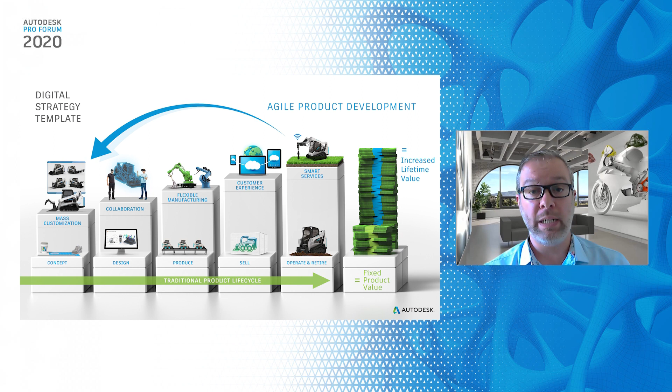As I mentioned, organizations relying on a linear process often experience the challenge that this type of workflow results in information being reworked, information lost, errors, and productivity wasted. In fact, when we look at a company that already has various technologies in place, they often still fall back to manual processes to communicate and share with other parties.

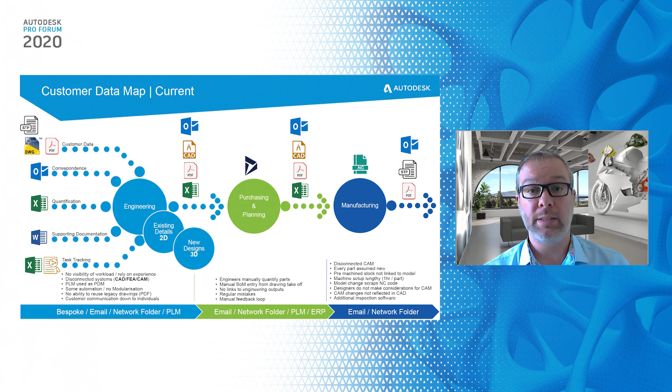In the UK alone, when we run discovery surveys for our customers, their teams often come back and tell us that on average they're spending 21.5 hours per person per week on activities that just don't add value to their design, engineering, manufacturing and delivery process. Obviously, it can include activities such as email communication, but there's always a significant amount of time and effort lost when they try and deliver their projects.

As you can see, based upon the previous example, we don't expect to come in and disrupt an organization's workflow to streamline it. What we want to do is help these organizations to resolve their barriers and challenges by developing a connected, streamlined workflow that we call a digital strategy template. Because by having a strategy, you have a better chance of success. By the end of this presentation, what we'd like you to be thinking about is, where are you today? Where do you want to be? And what's stopping you getting there?

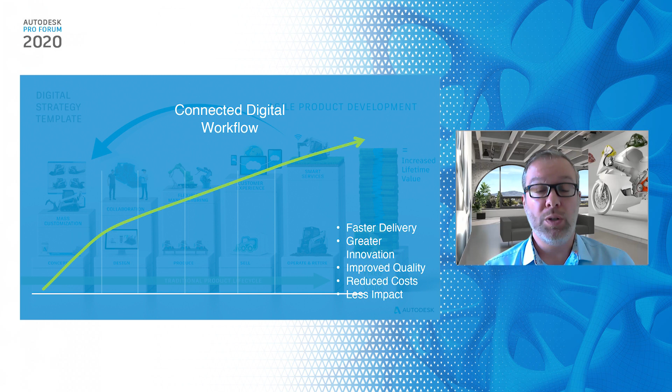So let's take a look at a set of examples that can be used to help you develop an end-to-end workflow. We're basing these set of examples on a customer that has two types of product. One mainstream, customers that can choose a set of options to ultimately choose and select the product they wish to purchase. The other, something that is engineered to order. Roughly, often 80% standard and 20% that requires an engineer's input to develop a solution to.

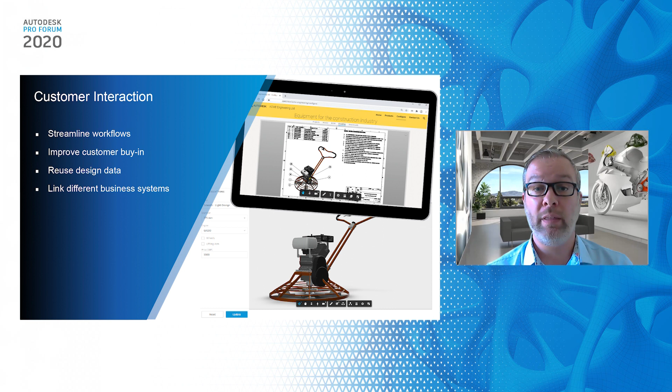So what we're looking at first is this idea of a configure to order workflow. Customer interactions that need to be able to utilize the engineering logic that you built into your products, but make it available much earlier on in the process, enabling your engineers to spend more time and effort working on things that are more profitable.

What you're seeing on the screen here is the engineering data with a certain amount of logic built into it. But this product isn't something that needs to be re-engineered every time a variation occurs. In fact, the organization has defined all the predefined options that a customer can select. Obviously, this product needs to be manufactured in the first place, and we need fabrication details to suit. But by making this data available for your customers or your sales teams, it means you as a design and manufacturing organization can spend more time on the profitable undertakings.

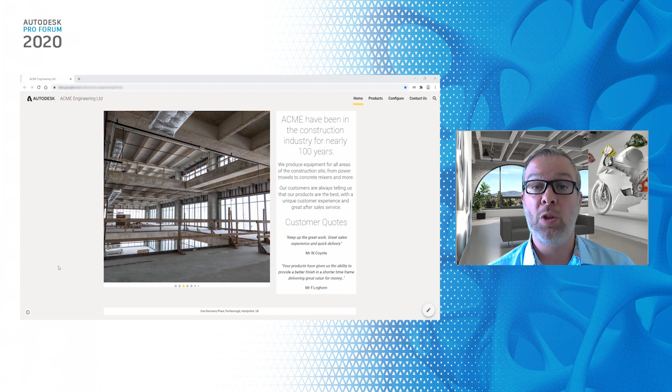By making this standard application available in a customer environment, as you're seeing, it means the customer can get an understanding of what's input into that design, what they can choose from, what it looks like, what it might be broken down into, and select the various options that you've allowed them to dictate.

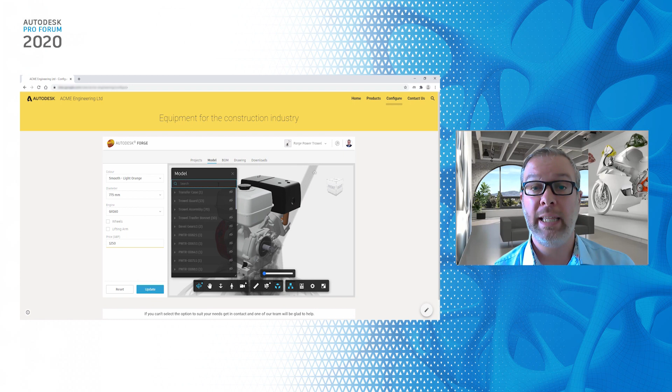Once these options have been defined, they can then submit either a request for a more accurate quote, or in this example, you can see once the customers place the inputs, they can then define the sort of feedback they want to receive. For example, what type of outputs they might want to utilize and communicate with. Whether that's just the 3D representation of the design, or elements such as the cost, the bill of materials, and anything else that you want to allow them to have access to.

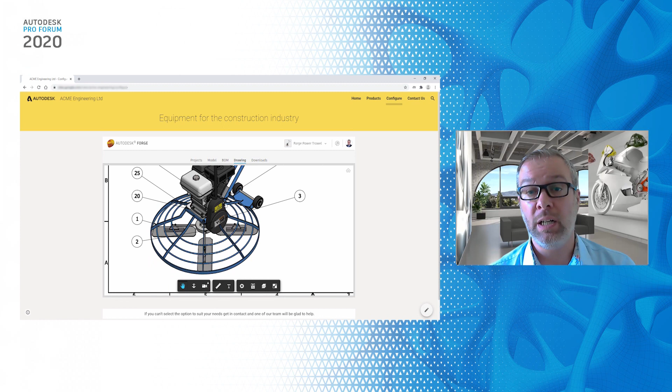Again, making it a much more streamlined workflow because your customers are gaining access to this information, and often customers will make their buying decisions before they've even spoken to you. So by making this information much more available, much earlier on in the process, means some of the hard work has been already done when that customer contacts you for the final order, for example.

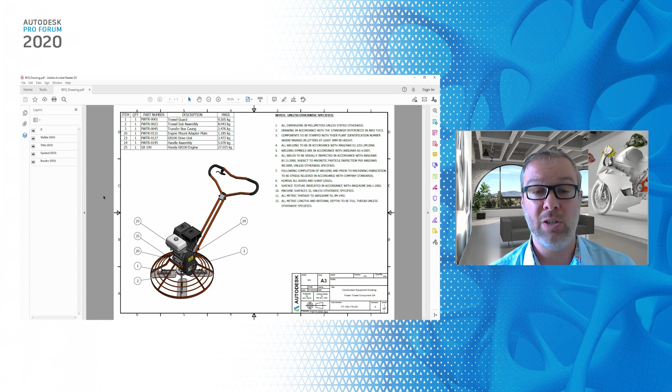And as you can see here, by allowing them to download additional file formats, it's giving them access to information that they can supply to you to make it much easier for you to understand what it is that they want.

However, not every project can be just made available on a website for a customer to interact with. Your engineers are still there to undertake the value-add tasks. So, how do we define what those engineers are doing, what current work is in place, and what information we need to capture from the sales teams?

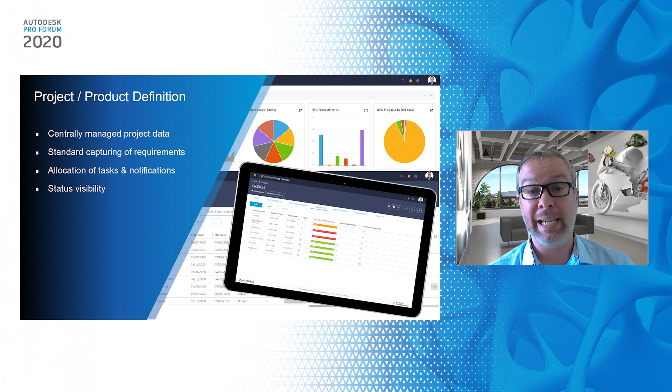By utilizing an upfront workflow, being able to capture the requirements upfront means everyone in the business that has access knows where that project is, what the requirements are for that project, and where they are currently within that process. This example is showing you how a design manager or someone in the business that needs to make the decisions can understand how many projects we've got going on, who's undertaking those projects, and whereabouts are we within that process.

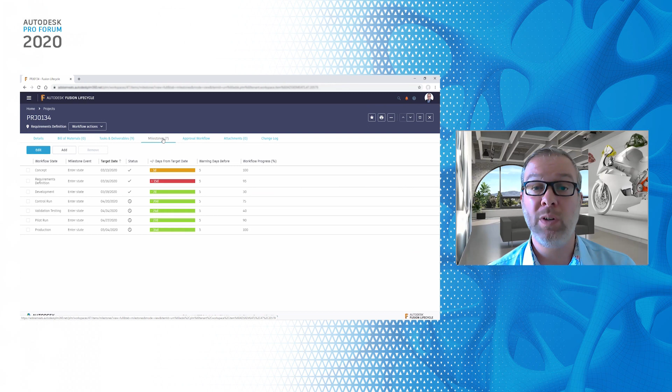By capturing the information that's been defined up front means instantly they can get an understanding of maybe who's got the headroom to undertake the next task, how much effort is going to be required to deliver that project, where are we within the timelines of that project. But the real benefit here is we've got a controlled way of driving the next process. When the engineering manager in this scenario understands all the requirements have been met, they can then move the workflow on to the next process.

The design engineer is then going to be notified that something has been generated for them to undertake, but also the downstream benefit of what you're seeing here is an environment has been created in the design environment that means they don't have to sit there and think about what's the project definition, who's asked for it, what's the numbering schemes we're going to use. The structure that the engineer is going to undertake and work in has already been predefined, and it's now down to the design engineer to undertake the work that they can achieve.

Now, I mentioned right at the beginning that most organizations, even if their product is engineered to order, there is often a heavy element of reuse. 80% in this scenario may be standard and 20% will be re-engineered to suit a new customer requirement. So the design engineers need an environment that allows them to quickly find and reuse to generate that new development.

What you're going to see next is how the design engineer can find the relevant information very quickly, being able to filter across all the previous projects that they may have undertaken based upon certain criteria that they know. In this case, it might be a description and a material specification, but instantly they get an understanding of the impact of any change. At the same moment in time, they can understand the complexities of everything that goes into that design, while also getting a feel for what it previously looked like.

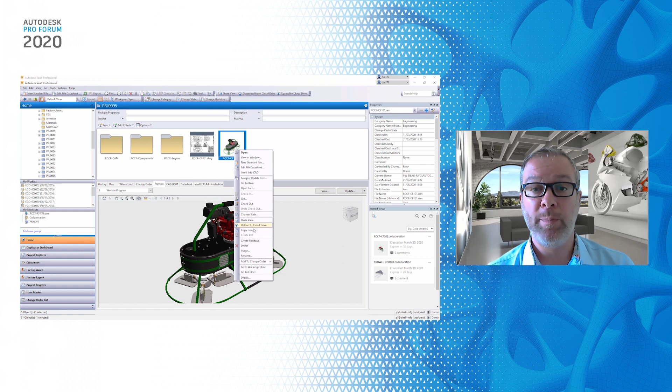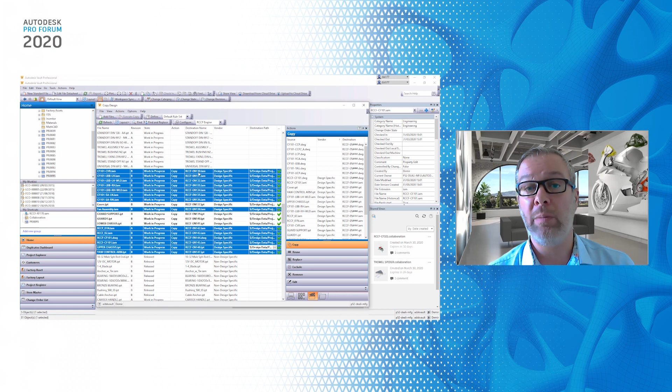But because this is going to be an engineered to order solution, they're going to reuse as much as possible and copy the elements that they're allowed to modify and manipulate. What you're seeing here is the engineer not just pre-selecting the information that they're going to reuse, but defining the data that will be copied with a new numbering scheme that they're then going to utilize to develop that new project definition. This then becomes the start point for everything they will do moving forward. The downstream advantage is all the hard work has been done.

There may be engineering logic that's already applicable to the design, but they want to limit what an engineer or a designer can change. You're also seeing here that the designer can get a very quick appreciation for the amount of information that they can actually modify. In this case, being able to see what's still locked down because we just reused it, and what information is available for me to edit and change based upon the controls that are in place.

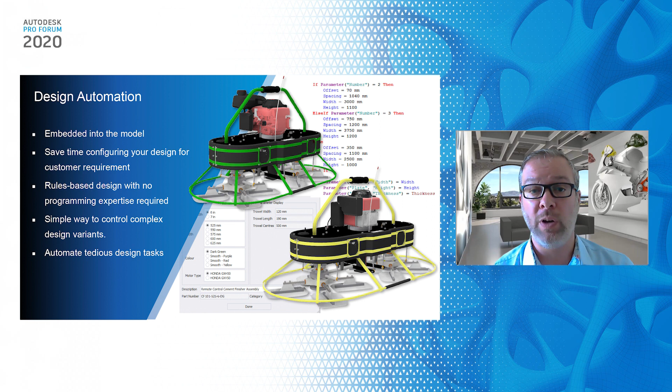Remember, we've already undertaken the project and we are making changes to it. So there is already a whole host of engineering logic that the original designer has implemented within that portfolio of applications and products. What you're seeing next is how we can utilize some of the design standards that you can build your own logic into your product to enable your design engineers not just to quickly reuse, but to manipulate this product to suit a new project requirement.

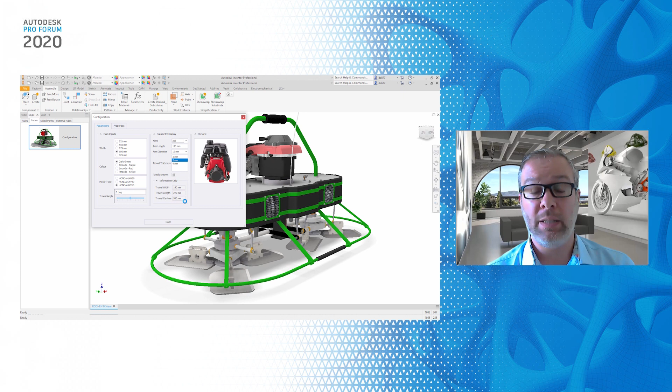Because we have that 80-20% rule, we're going to use the existing project as the basis for a new design. However, there is a whole host of intelligence already within that initial design. So the designer in this particular example is actually making changes based upon previous definitions within the remit of what they're allowed to do. Don't forget, this is pretty much that 80% of change. We're just changing things that I'm allowed to change. I'm not necessarily reworking a lot of these items yet.

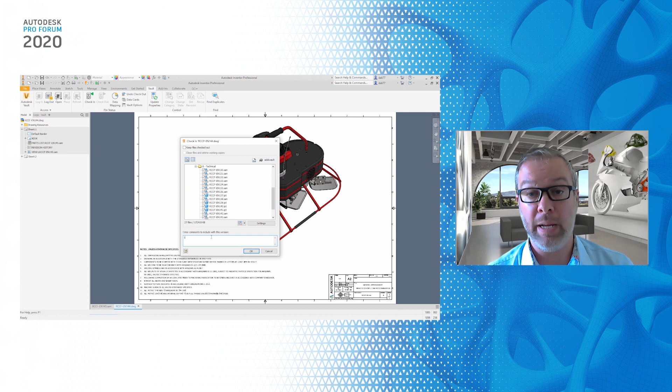However, once we've done the basics, not only is our drawing going to update automatically, but then we can spend more time working on the elements that need re-engineering. So once we have the basis for this new product, we can then send this back into our data management environment for the next person to undertake the task that they need to.

Now, when information needs to be generated, we often find that organizations have a whole host of data available in lots of different formats. Often this could be information that was archived a number of years ago, so it doesn't even exist within a CAD environment. What you're going to see next is how we can take information that's been previously archived and utilize that in an intelligent fashion to be able to give us that kickstart into designing a new component.

Here you can see just a PDF file of a previous design that has been archived away a number of years ago. But because we can manage it, we can find it quite quickly and decide whether it's suitable for reuse. What you may not have noticed there is I brought that PDF file into a 2D environment that turned it into an intelligent set of information that I could utilize. We can then reference that data inside of our model environment.

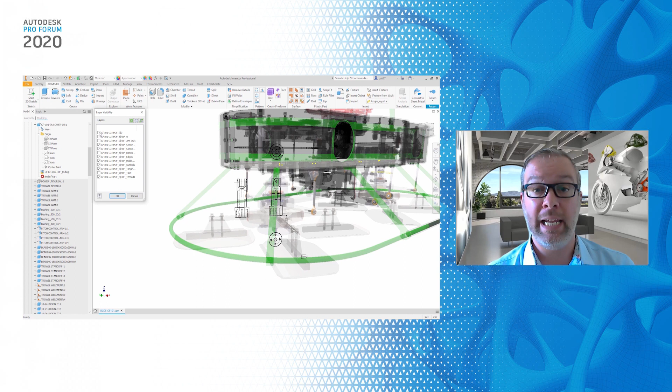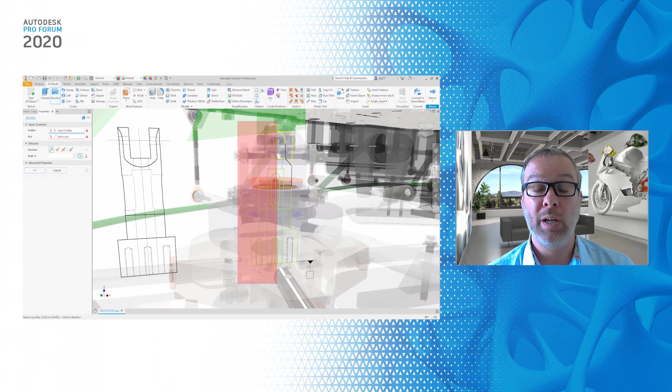So it means that rather than me having to create information from scratch or refer to prints that I'm going to utilize off my desk, I can start consuming the information that's now in intelligent format to develop our new component. In this case, it's going to be the shaft to support the trowel subassembly of this design. But because we're working in a common 3D environment, we can get an understanding of the form and the function of that design, even though this started off life as a straightforward PDF document.

Once we've developed this component to a suitable level of detail, we can then have an understanding of how heavy it is if we specify a specific material, or if there's other information we need to consume, such as different orthographic views. There's nothing stopping you from reusing that information time and time again, applying the mechanical detail appropriate to manufacture this element.

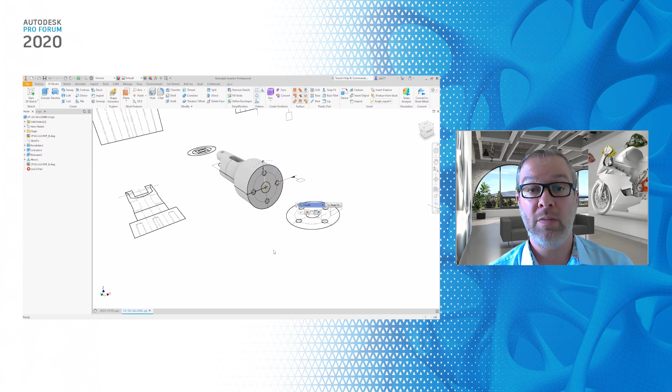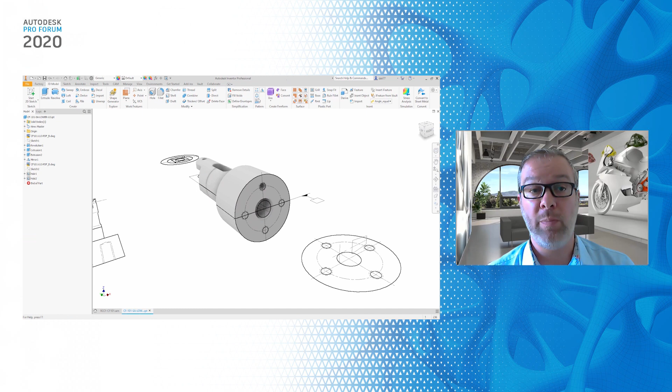In this scenario, you can see we're referencing the same information time and time again, in this case to develop an alternative location of features on the design. However, everything is associated back to that 2D data where we consumed the PDF file, so I don't have to generate a new subset of 2D documentation, because so far we haven't actually made any changes. We're just developing a 3D form that we can utilize to understand, is that going to fit?

But don't forget, we have turned this into an intelligent 2D drawing. So if a design change is required, we can go back into that 2D environment, make our change, and see the impact of what we've done in our 3D world, giving the user ultimate flexibility to consume information from lots and lots of different sources.

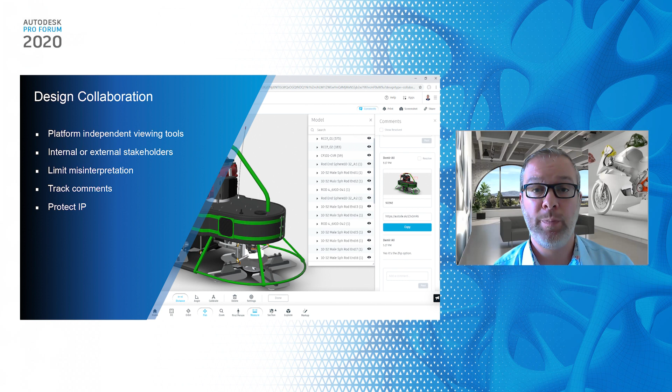We often appreciate that a lot of customers struggle to collaborate. They often resort back to traditional methods such as email, imagery, static 2D drawings, and PDFs to communicate their designs. What you're going to see next is how we've given our users the capability to collaborate, not just in a secure fashion, but give their users a unique experience that allows them to explore the products before you've made them real.

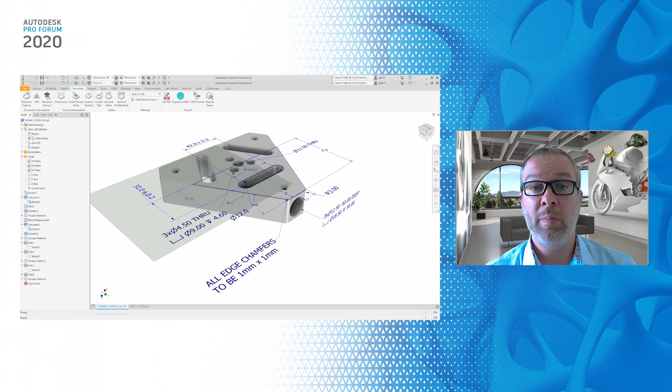We also often find that depending on the level of technical ability within organizations, people can misinterpret 2D drawings. In the past, organizations producing documentation purely relied on 2D drawings to communicate their product design downstream. Now we can take that and make it in a much more flexible manner, much easier to consume.

You should be seeing on the screen that we're not just relying on 2D drawings and documentation to generate the information necessary to manufacture this part. We're adding 3D annotations, consuming dimensions developed within the modeling environment to show what that component should be manufactured like, what tapped holes are applicable, what surface finish if we want, and what tolerances are applicable to that design.

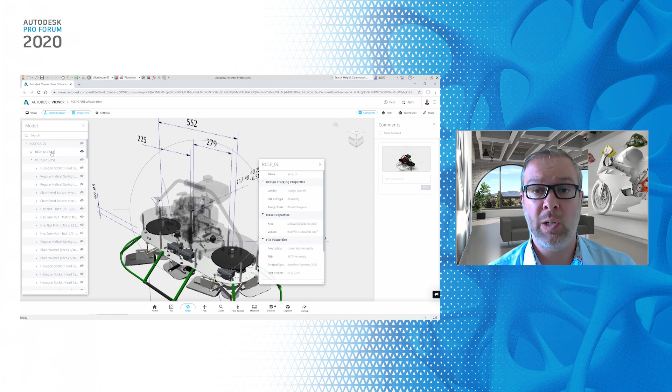Once we then start communicating that design, a customer or someone internal or external with a secure link can start interrogating that model based upon the information you've shared. They can start pulling it apart, turning things on and off, and getting a much better understanding of what your intention of that design was there to address.

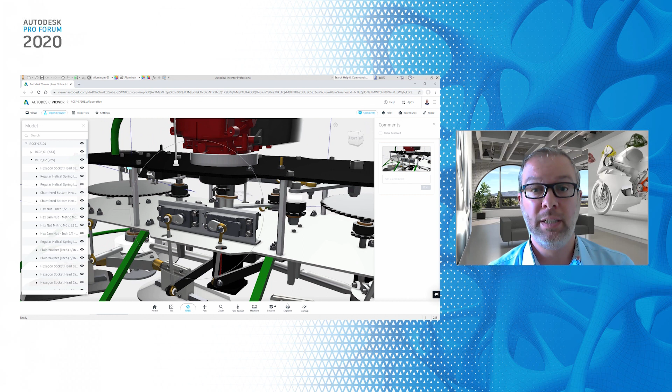It also gives them the ability to comment and mark up. In this scenario, they've been able to see that a challenge may have occurred based upon something I've overlooked. Being able to collaborate on any web-enabled device means you can get feedback from the field, from third parties, as long as they've got access to the internet.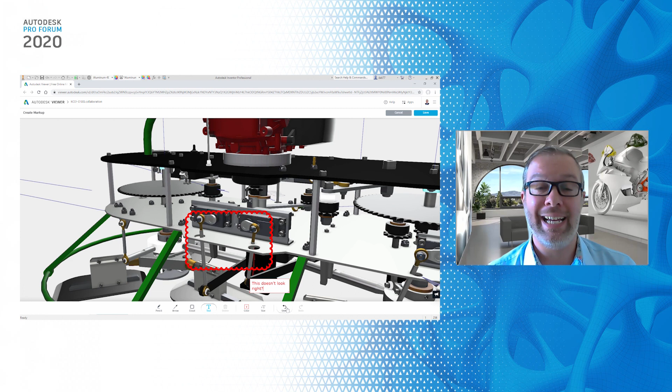The one benefit of what you're seeing here is that they're not just marking it up and applying comments to the design I've shared, but as a user within my CAD environment, I'm getting to see that feedback. I'm not having to go and try to interpret imagery or static documents that may have been marked up. I can understand natively, based upon the information I initially shared, any comments applicable to what I want to achieve.

We also appreciate that when you're communicating with third parties - and when I say third parties, it could be a supplier, someone else in your business, or your customer - you're delivering data in another file format. We often find organizations aren't lucky enough to be working with one platform, one version of that platform. We're often having to consume information from lots of different other software vendors' file formats. So what customers need to do, to remove that barrier and rework of information, is to be able to consume that data as easily as possible.

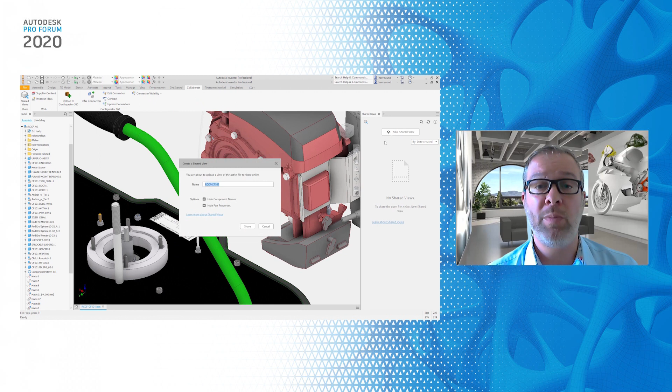Within the design environment we work within, we can work with information across the majority of manufacturing suppliers. In this case, you can see how we've referenced a SolidWorks model because the supplier of this engine is utilizing another platform. But when I reference this design, because I'm not translating it, I'm just referring back to the original, we can see that there's a problem - the supplier's given us something that isn't suitable for our design.

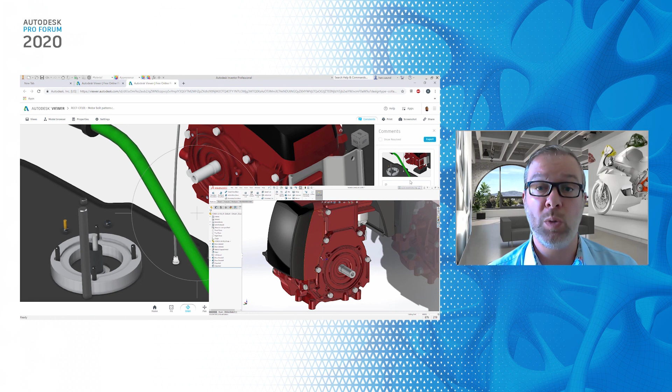And what we need to do is tell them that a change is required. Utilizing the workflow you saw a moment ago, we've been able to communicate back with the supplier, make it really obvious what changes are required. And by consuming information via the cloud, they've been able to supply the data back to us in a connected workflow that means we can see and understand the changes that they've made.

By consuming that information and utilizing it, we can now understand how it all fits together. And we've been able to work in a really collaborative method with people that don't necessarily have access to the same tools as us. Once we've positioned the component, we can then start understanding, are there any other possible challenges or issues that may be applicable to this design?

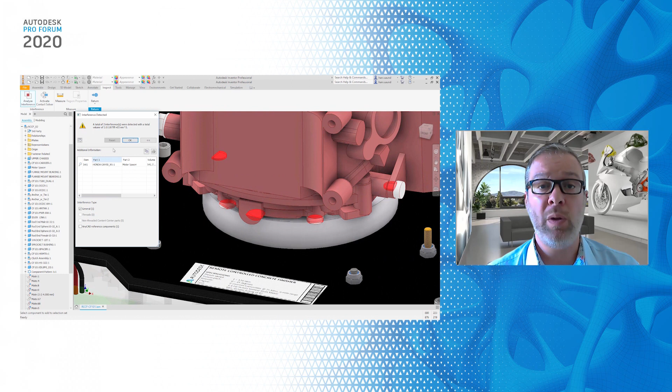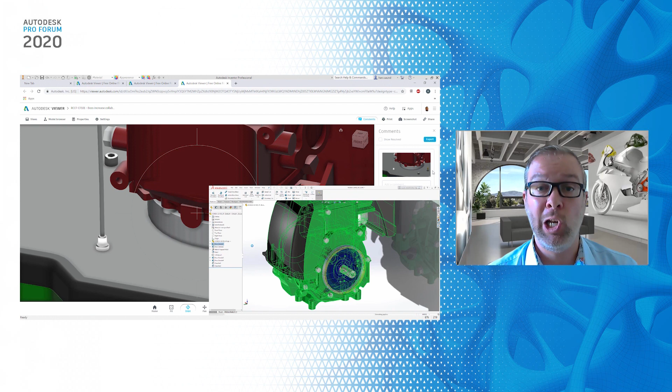As you can see here, by running a quick analysis of any clash, we can now understand that although we've asked for one change, the reality is the adapter plate or other aspects around that mating condition need to be modified. Again, working in this complete cycle of review, we're able to communicate, our customer or supplier in this scenario is able to understand, and they can then pass any changes back on to us so we can understand the impact. Working in that complete loop allows you to remove the barriers of rework, be able to make you more productive and deliver information to, in this scenario, production much faster than in the past.

Now, when design engineers are working and developing their products, they need to have an understanding of what challenges they may face downstream based upon the tolerances that you've applied. So within the same environment, utilizing the same information you've seen throughout, design engineers have a great deal of flexibility to be able to analyze and interpret the overall impact of elements that have gone into their product design.

What you're seeing here is the information that we actually applied earlier on. We've got the overall tolerance analysis of the design. What you're seeing here is a 1D stack up. The user has been able to define what direction they want to look for any tolerance challenges. The system will then come back with all the information that could have an overall impact on the end conditions.

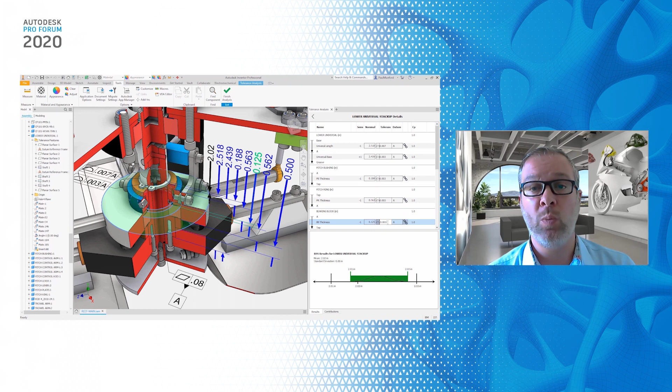What you're also seeing here is the user can start interacting with that information, understanding the worst case scenario, any statistical reports they want to understand. And the reason this is important is if you can imagine, we can understand that the overall impact of all the tolerances within our design will actually make our mechanism outside of scope and a change may be required. We can provide the report and the evidence of why that information needs to change because it will not meet the overall conditions and scope of the design that we're introducing to the market.

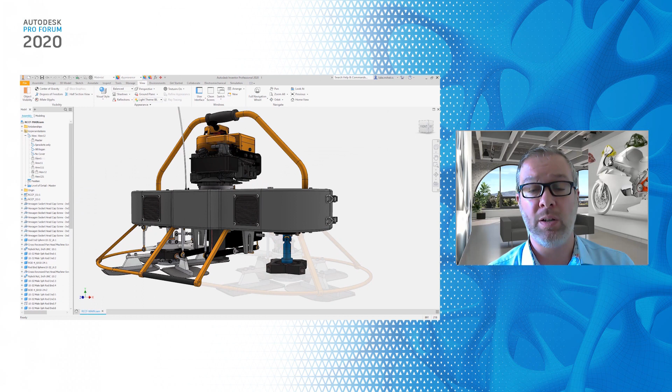Something that a lot of customers take for granted is the ability to be able to analyze. Now, we speak to lots of different organizations that utilize different platforms and different methodologies to bring their product to market. Depending on what industry you're in, you may rely on a third party to code check your design, and that's still valid. However, we often see that organizations struggle to make changes based upon feedback they're receiving from people that are analyzing their designs.

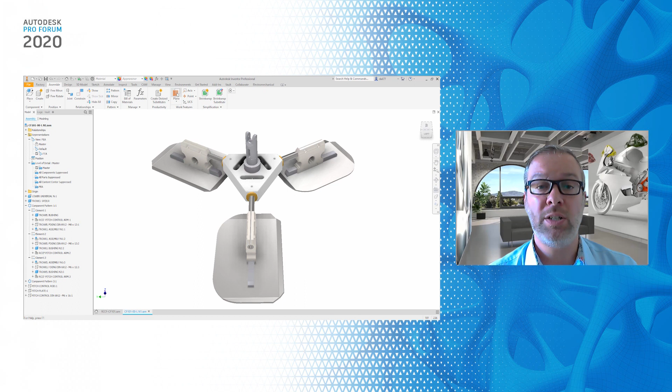What we want to introduce is the ability for designers to be able to iterate their product, iterate their challenges before necessarily passing that on to another third party for final verification and validation. But remember, we reused a previous design, and that previous design has already been validated, but we have been making changes to that design. So within the same environment, the user, the designer in this scenario, can start verifying and validating what they see, what it fits like, what stresses and motions are applicable to it, and whether any changes within their undertaking have impacted their final result.

So without the user having to do a great deal, in this scenario, change the motion load based upon the new motor that was inserted into our design, they can have an understanding of what sort of impact that new motion load will have on their overall design work, and the changes that need to be made to overcome the overall safety factor, the deflection that's appropriate for quality, or anything else that's appropriate to that design.

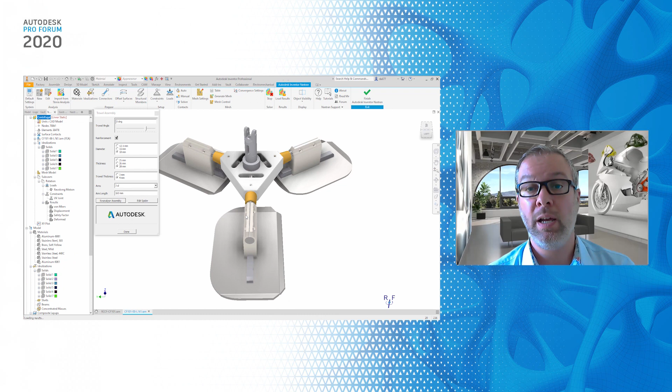And because we have the logic built into this component, we can start making changes based upon what we're allowed to modify. In this scenario, you can even see that we can quickly rerun the analysis without having to go back into the environment, because we've already done it once. We've made changes to the design, and we just want to see what changes and how they impact the overall output.

In this case, you can see that we've significantly improved the overall deflection, and we're now within the quality aspects of what we want to address and deliver to our overall solution.

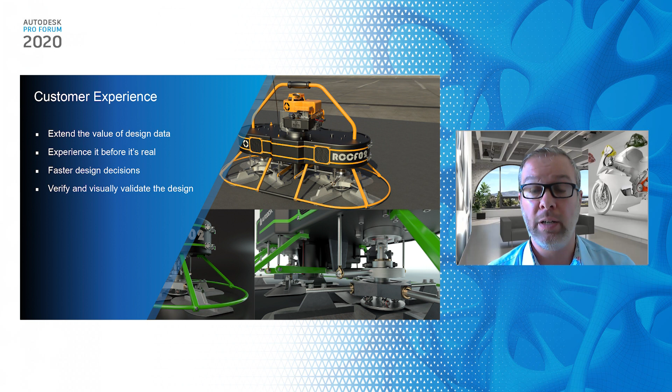Now, when it comes to communicating with your customer, we talked about customer experience at the beginning. One of the ways you can improve customer experience is getting that person into the room, or understanding what it is you're developing before you physically cut any material. In the past, organizations have often relied on rendering capabilities to show more realistic imagery of what that overall concept will look like before a physical item is produced.

However, we can now take that one step further, whether it's building a customer's confidence in what you're trying to develop, providing an interactive way for them to see all the possible options in a more realistic manner, or developing a more immersive environment where they can see in front of their own eyes what it looks like and understand how it works.

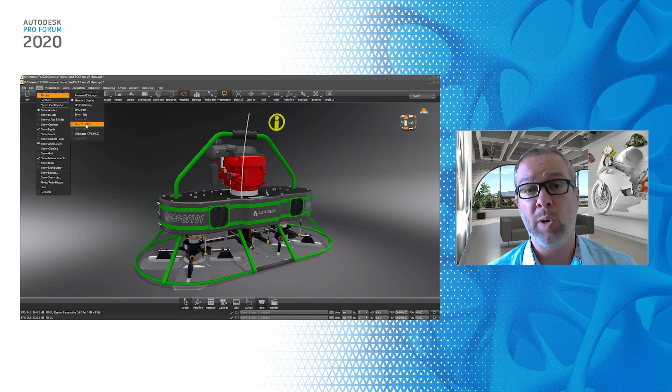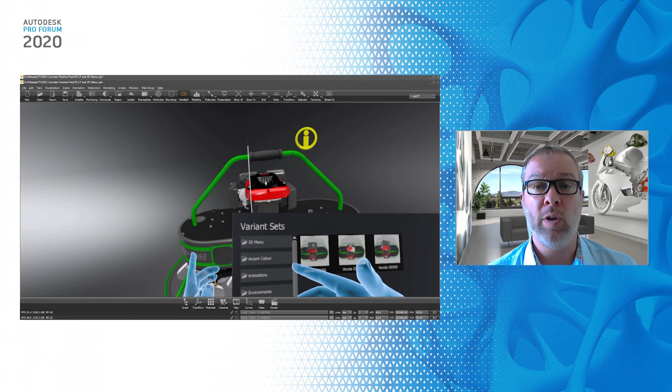So not only can we start interacting with this like a point of sale tool, we can start immersing ourselves in a virtual reality world where we can see the overall size and envelope we're working with, where we can start interacting with those options, whether that's just so they get a better look and feel of the material finish or anything else appropriate to that design.

By immersing themselves in the VR world, not only does it give you the ability to have a better appreciation of that product, but it also means you get an understanding of the overall size—not just the look, but the overall aesthetics of what that will look like.

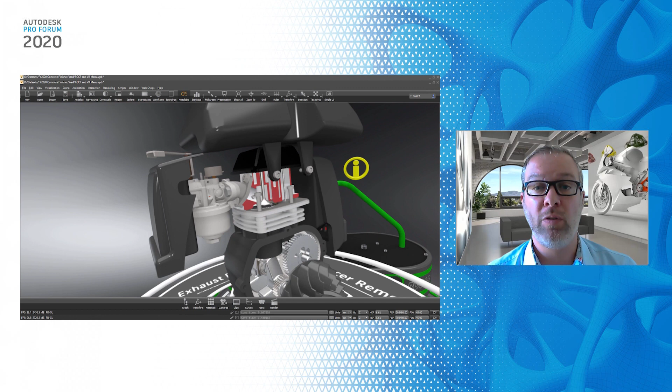In this scenario, you can even start producing technical information, whether that's the ability for someone to immerse themselves in an assembly instruction, a maintenance manual, or even putting tools into their hands so they get an understanding of how much space they've got to work with if they have to maintain a product, and what the overall health and safety requirements are if they're moving between equipment.

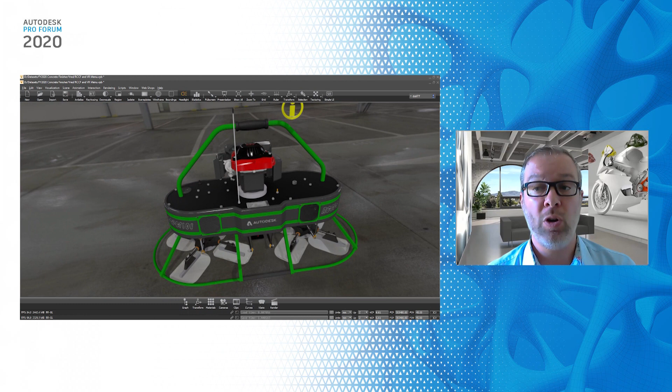But again, we can also mix reality. We might be in virtual reality, but we can start connecting the virtual world with the physical world—not only seeing how this component and product is going to look, but controlling it with a physical controller. So although they're in a virtual world, they're physically working with the controller that could be used to maneuver this design. Again, bringing in that customer experience and offering something a lot of your competitors are unlikely to be doing right now.

We often speak with organizations who are aware of a lot of the capabilities coming onto the market. A few years ago, Autodesk introduced generative design. Generative design allows you, the designer, the ability to define what sort of load conditions and envelope a component might be expected to work within.

Rather than a designer trying to develop individual iterations, which are often limited by time—so even when they are iterating different forms, they might be limited to no more than a handful because time often dictates a designer can't spend overly excessive amounts of time developing a solution—wouldn't it be great if a designer could define the outline, submit the overall project to the cloud, and utilize the infinite computing power of the cloud to come back with lots of variations in form that a designer can then select, based upon material characteristics, manufacturing selection, or safety factor, to come out with a form they may not have been able to think of using traditional techniques.

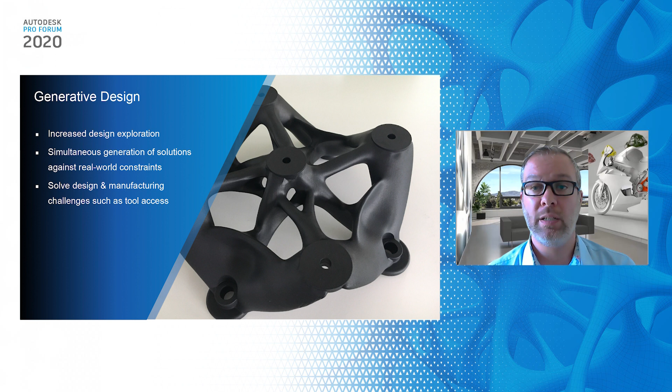What you're seeing here is the results of that generative design—the user being able to select, based upon their knowledge, something suitable for what they want as an outcome.

In this scenario, not only is the product significantly lighter weight than what they've done in the past, but it's also stronger. It might use a more additive approach, but it again allows them to develop a project that's maybe more aesthetically pleasing, but certainly unique compared to their competitors' offering.

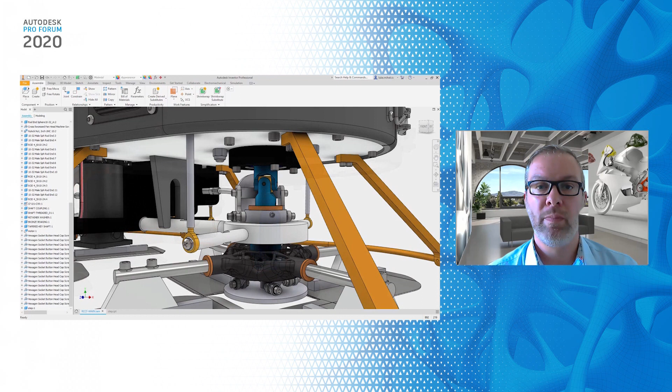When it comes to manufacturing, we again see that even if an organization has the ability to drive their machine tools, they're often thinking about how to best communicate information between the design environment and the manufacturing environment, often working in disconnected systems, which means rework can be time-consuming, and any changes made need to be re-engineered within the manufacturing world.

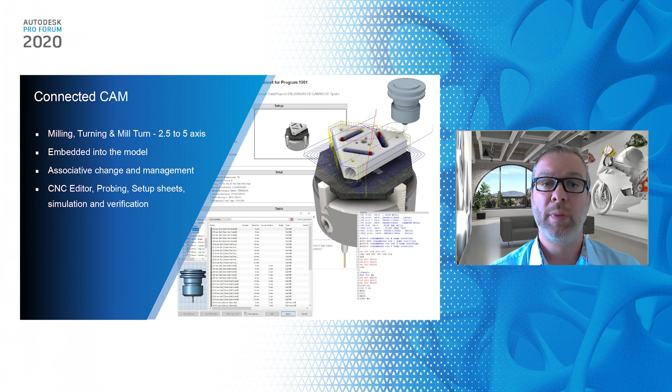What you're seeing here is the same design environment with the manufacturing information completely attached and enclosed within the same window. The design has already been done once, so the original manufacturing information is already captured within that data that we copied. However, there might be information we've added since that we need to add toolpaths to.

So what you're seeing here is us modifying the original toolpath that we copied and adding information to it that now allows me to pass this on to the machining center or for machining verification. But it is fully associated back to the design environment.

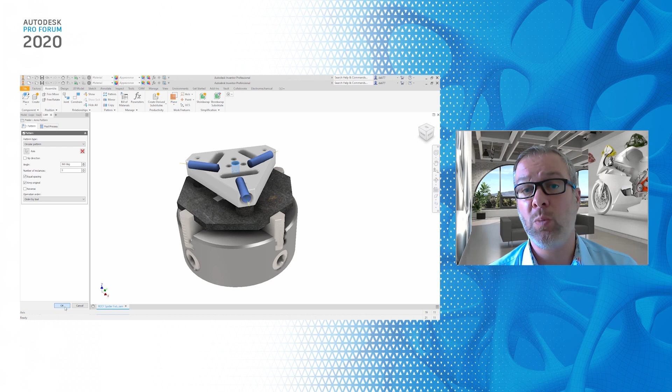So if a change is required based upon customer request, all we need to do is go back and make the change, maybe modify the tool paths that are appropriate, in this case the number of drill positions, and everything else will update accordingly. So the outline, the remachining of the adaptive clearing, the material we need to get rid of to give our final finish, is all being updated with a minimal amount of effort.

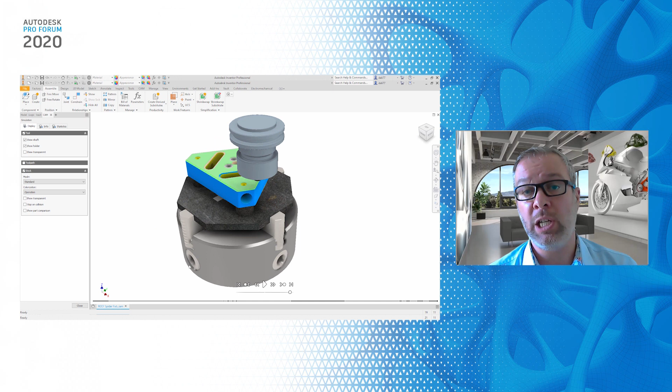The benefit to organizations is if your design engineers have the knowledge, they can get an understanding of what the change will mean based upon the manufacturing process that we expect, how much time would be added to the overall finishing of this component. We can also see the overall and output the NC code, the G code that's applicable.

We have an understanding of what setup's required, so the guy in the machining center can understand what tools are required, the order in which they should be placed, and anything else that's appropriate to that machining operation.

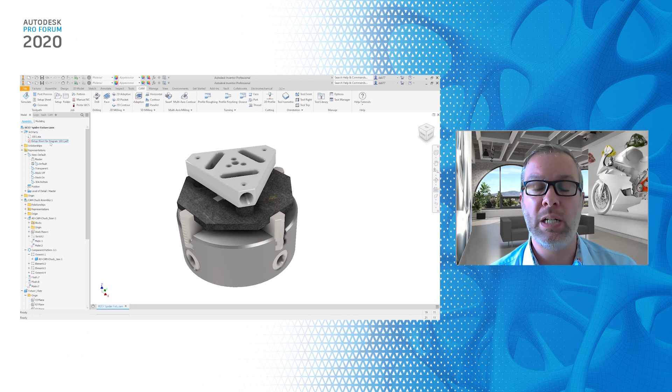And finally, what you're seeing here is not only is everything embedded into that one design environment, but all the associative information with it, such as that setup sheet, such as the G code, is being managed in the same environment. So all the engineering data is being captured, saved, and controlled, so anyone with the relevant access can see the right information at the right time.

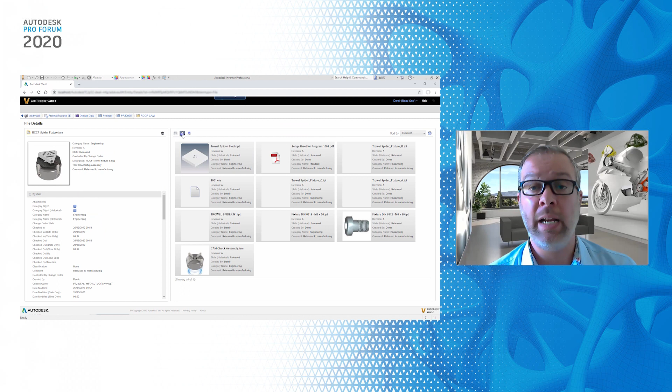Now, if you can imagine the operator on the machining center has a system with a browser, they can then log in, and as long as they've been given secure access, they can download the design data, download the G code, download the setup sheet, and anything else that's appropriate that's been stored with that one common source of truth.

Now, you might not have noticed that the design engineer put the information to review. And what we need is a more flexible way, and what a lot of organizations need is a flexible way for, say, engineering managers to be able to communicate with that team, maybe approve data on the fly.

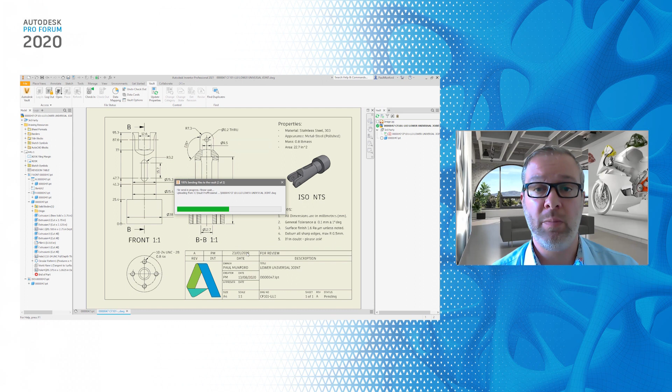So what you're seeing here is the design engineer checking information into the data management system. They're associating any relevant data, in this case maybe a manual document that's also associative to that design, and they want to make that data available to the rest of the business. But to do so, they need to go through a review process.

Now, when this design data goes through the review process, it might be that, especially with the current situation, you're away from the office. As long as you have network access using the mobile device, we can log into the system and start reviewing the data that we've been asked to look at.

As you can see here, not only are we checking information out because we've been given the relevant provision and access to be able to do so, but we can also start utilizing the benefits of some of the mobile capabilities to start commenting on the information that's been shared with us.

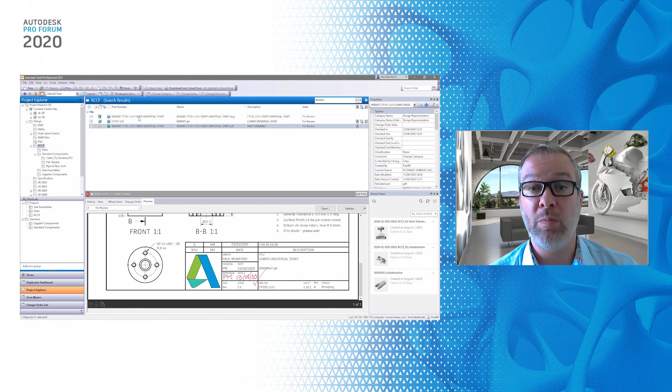In this case, it's not really meant to be a physical signature, but it is giving a workflow using mobile information to be able to comment and review that data and even start changing the life cycles. So as long as the engineering manager in this scenario has the relevant privileges, they can then move design data through the stages to eventually release this information to the rest of the business.

Once this data is then released, we want to start thinking about how can you make more benefit from it? How can you ensure that everyone downstream has got access to the right information?

By connecting all of this information through, it helps our customers have that synchronized workflow, whether they're delivering the data that we produce to a business system, or whether we want to make more intelligent information available to site, so people installing, disassembling, or just doing general service work have something that is of more value to them.

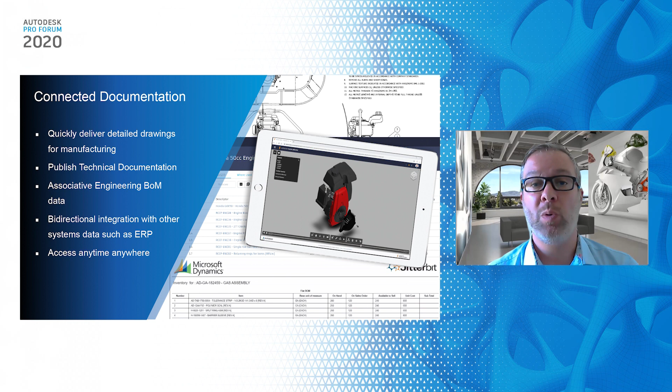So what you're going to see here is two workflows. The first workflow is me making this information available to the rest of the business.

To do so, they then push the data into a suitable workflow. In this scenario, what we actually want to do is generate a technical document that allows someone to interact with our 3D design, not just rotate it, not just look at the properties of it, but actually see the sequence of how something should be assembled or disassembled, and maybe annotations that go along with it.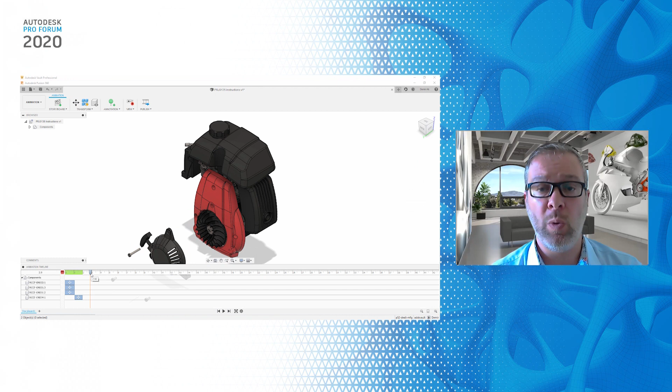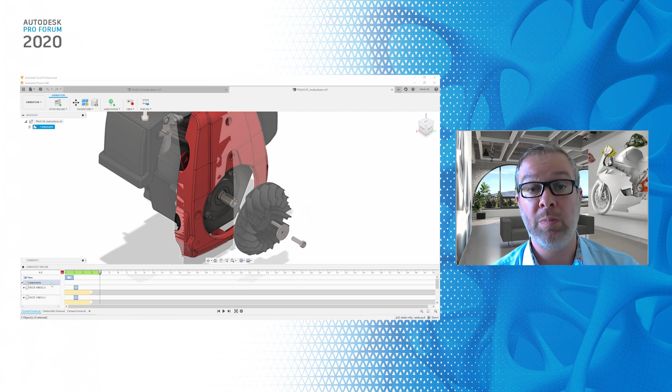By making this data available to the cloud, we can then utilize our cloud platform to build something that's a little bit more interactive. By pulling the components apart in the right sequence, we're not only developing an interactive technical set of information, but we can also deliver this data to our business systems, link it, so anyone with the right level of access can have a better understanding of what should be done when they need to maintain this product.

By then delivering this data to our business system, in other words, moving the information from external collaboration into released to manufacture, not only are we locking the design data down so everyone can understand and view the information when it's at the appropriate stage or gate, but this information is now being automatically synchronized to our business system. In this case, our Fusion Lifecycle platform.

The real advantage is we can now start taking the design bill of materials and start turning that into a manufacturing bill of materials, adding items such as paint or grease or non-designed elements that still need to be purchased. They still need to be stock controlled. You can also see here all the visuals that are associated to that design are also available within the system without anyone having to go elsewhere, really addressing the data at the center.

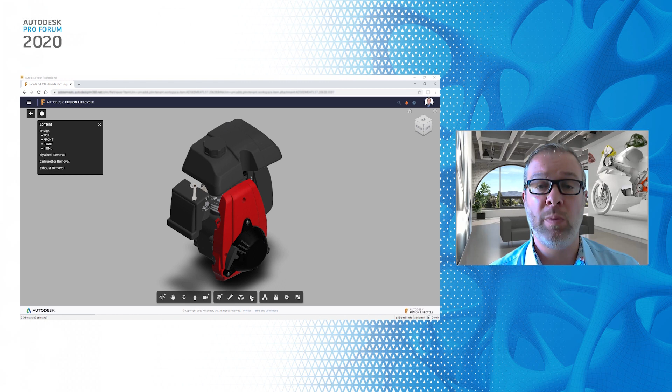And finally, what you're also seeing here is how the information such as the technical publication is also associated to that record. So anyone, anywhere in the world that has access to the system, with the security that you require, can now see all the information without the user manually uploading PDF files and anything else that's typically done within a lot of organizations that we speak to today.

The last two aspects of this presentation: remember we talked about flexible manufacturing. Now you've seen one example where an organization can utilize the embedded capabilities to address their manufacturing needs. In that scenario, it was around subtractive manufacturing. But we talked about automating production. Now that could be utilizing production lines, factories to build your products and optimizing those factories. But in this particular customer example, it was about automating the setup on the machine tool itself.

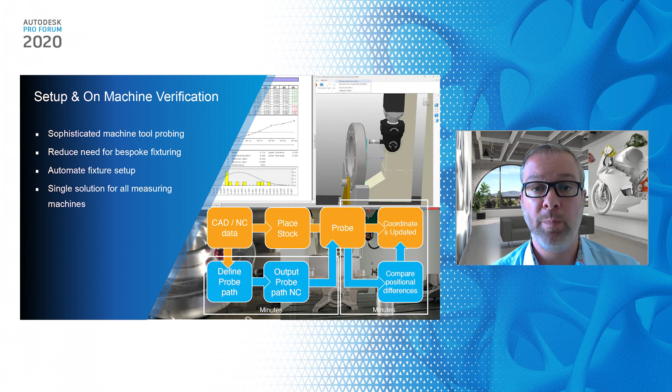When organizations work with pre-machined stock, it's often quite difficult for them to set that machined stock on the machining center itself because they need to move the origin and everything else that's appropriate to the G-code. What you're seeing in this example is on the left-hand side, the manual setup, and on the right-hand side, using our automated setup capability. Now on the left-hand side, the user of that machining center is having to manually manipulate the stock that's been pre-machined into the relevant position. So when we start machining the final finish, the component and 0, 0 is exactly where I expect it to be.

On the right-hand side, with the automated setup, what we're actually doing is placing the stock material anywhere within reason on that machining bed. We're then probing that position and the code is being modified to suit the position on that machining center itself. Now, even if you don't understand some of the aspects around this, what you should be able to appreciate is the amount of time difference it's taken. On the left-hand side, over 15 minutes, and on the right-hand side, under 3 minutes, significantly saving the amount of time it takes to set up that component to start machining it. Again, it's about productivity and making your lives easier.

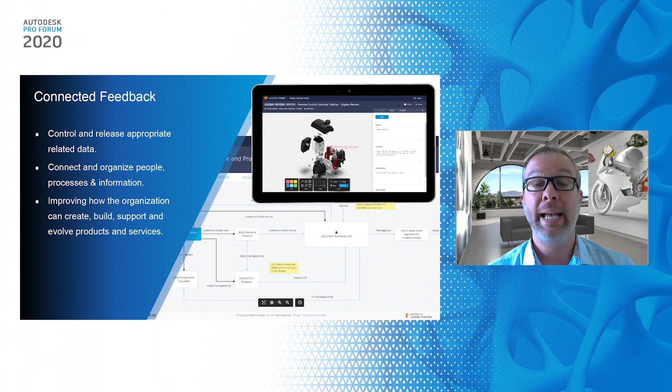Now, if you can remember those 5 steps, the final step was smart services. Now, this can mean many different things to different people, but ultimately it's about having that agile product development process, the ability to feed back information that may have gone out into the field or maybe going through final quality and assembly on your site. By being able to have data at the center, it means anyone with the appropriate access can start feeding back into the system, helping the next iteration of that design.

So what you're seeing here is a change being necessary. Within the system, we can obviously start understanding where we are within any part of the process. We can then start going through design process reviews.

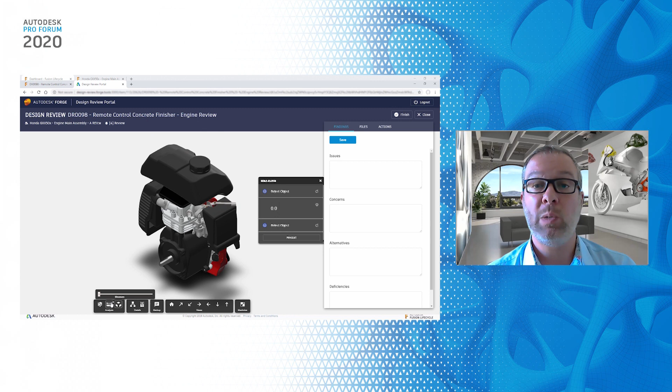In this scenario, we're allocating time and pushing something to the next stage. That next stage might be someone within the business that needs to review or inspect the final finished product. Or it might even be in a customer environment where you'd like to introduce a connected workflow that allows them to feed back anything that they see in the field.

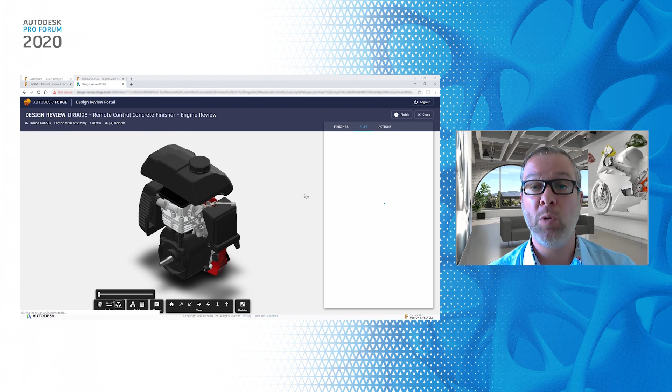Now, it's a very visual workflow, what you're seeing here, because we've built an environment where users can log in and start interacting with the design data you saw earlier in a much more visual and more impactful way. Being able to address, comment, but ultimately connect back into that feedback loop. So by introducing these comments, what we're actually doing is applying information to the design review. That design review will also then trigger a change request.

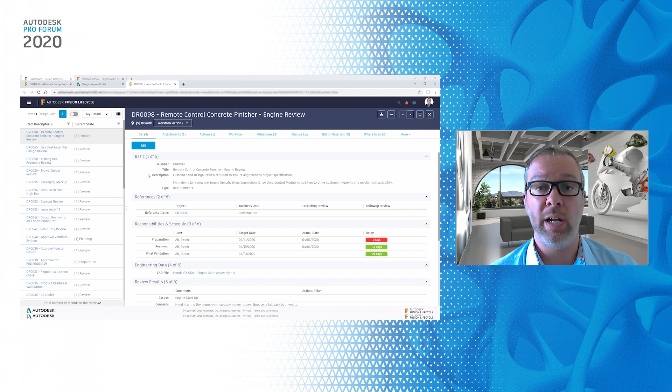So as you can see, once the information is passed on by that third party, back within our business system, not only will we be notified of the changes that have been raised, but we can then start controlling what we do with it. Is it really a necessary change? Has there really been a mistake? Or is it just that the customer needs an alternative for the next time we go through that design iteration process? In this case, the customer actually requested that we start thinking about an electric start.

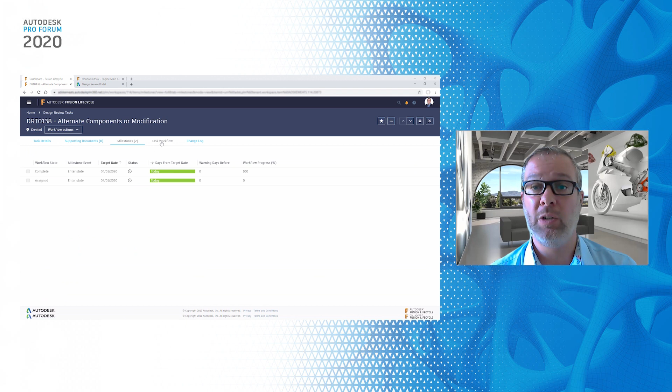So we do want to raise the design revision and start thinking about how we can iterate the next development process of our products. And again, it's about having that agile feedback loop, about ensuring that we've got availability and visibility of everything that's going on and control of who sees what when, but also where we are in that process and what trigger points we need to undertake the next task.

Now, I appreciate we've only had a short amount of time to go through this presentation, this content, and there is a lot, but I wanted to highlight and prove to you what we're doing for organizations such as yourselves to be able to connect that workflow from end to end. And the collection that we've gone through there gives you the ability to take your product from start to finish. However, there are a whole host of aspects that I haven't been able to cover in today's presentation. So please bear in mind, this is just a small snapshot of some of the capabilities

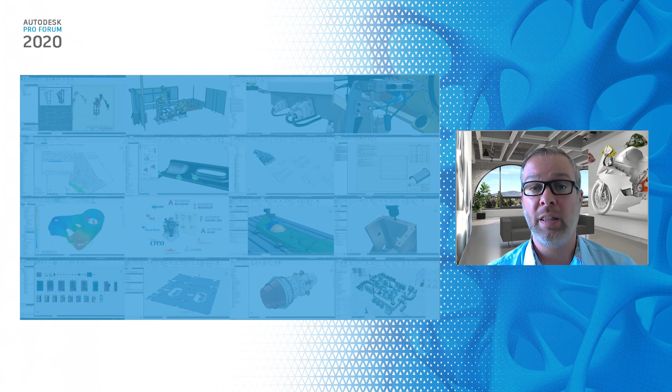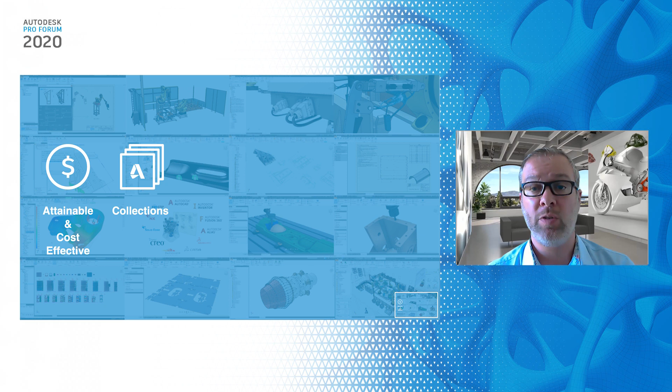that you can address with today's platform. And from an Autodesk perspective, we truly believe that we are offering our customers something that is attainable. It's something that you can be up and running with in a sensible amount of time. It's also cost effective because, as you should all be aware, we now offer collections. We appreciate that customers will rarely utilize a single application to address every single need they have within their design and manufacturing process. And by having a collection, it gives you the flexibility to utilize the right capability for the right task.

Ultimately, because organizations need greater freedom to collaborate and to communicate, again, everything you've seen there is cloud connected, meaning when you want to provide a more unique customer experience to get their feedback, or whether you want to make your information available to a greater part of your business, again, you've got a much more flexible capability to do so.

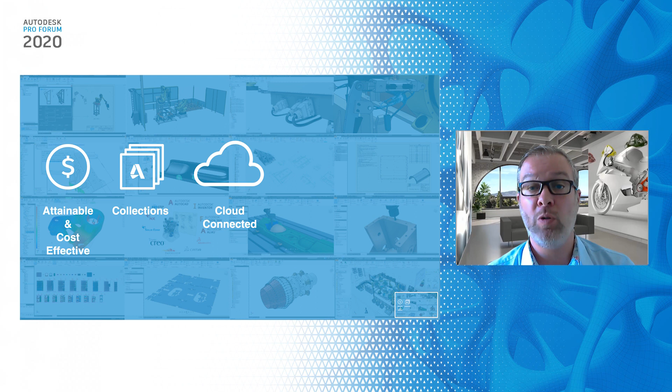Everything we've been talking about has been about productivity, about ensuring that smooth flow of information to ensure that you've got a faster time to market. And ultimately, we've only shown you a small set of examples. There truly is a much broader capability that allows you to grow and scale as your needs grow as well.